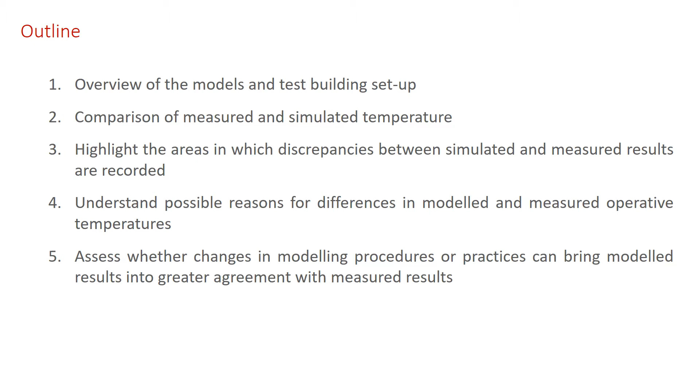So most of the results we're going to look at today are for the west house. The east house was basically used as a control with the windows always remaining closed, but again with all the TM59 schedules going on. For our tests we used two pieces of software, both TAS and IES, Dynamic Thermal Modelling softwares, these being the two dominant softwares for using TM59, both being CIBSE AM11 compliant and approved for Part L. And for this analysis, both Hilson Moran and Inkling supplied a user in each software.

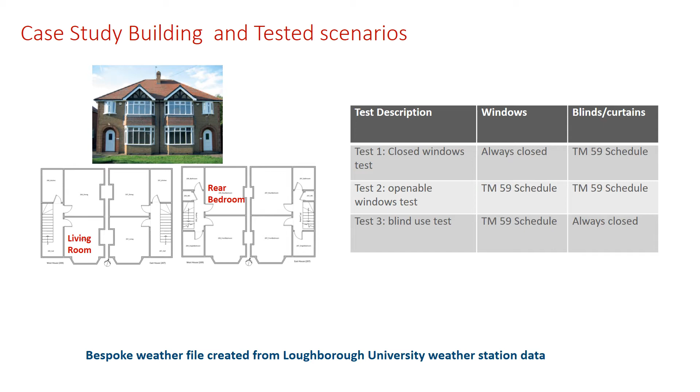There was also an additional temperature sensor in the back garden to account for any local temperature anomalies between the house and the weather stations on the university, which was about half a mile away. And from this we created a bespoke weather file to match the weather experienced by the houses.

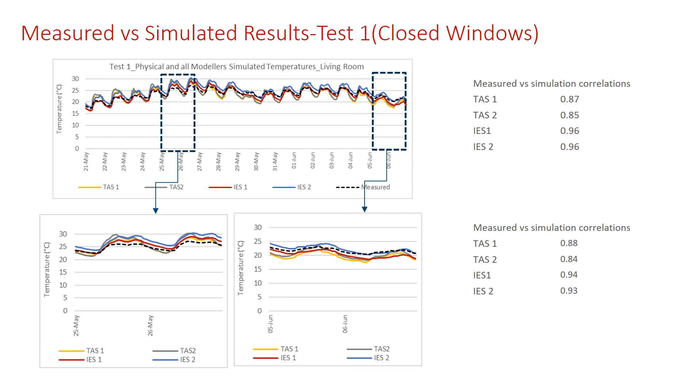So here in a bit more detail you can see the 4 model results were all in excess by several degrees of the measured results. However, over the course of the test the correlation still remained fairly good. When we looked at a cooler day, we get better matching, so some models were over predicting, some models were under predicting, but it was much closer around the measured results.

So the initial good news was that all the models were predicting very similar things, irrespective of the modeler and indeed the modelling software. So that gave us confidence that neither modelers or modelling software were doing anything particularly strange, and the correlations remained fairly good, again irrespective of modeler or modelling software.

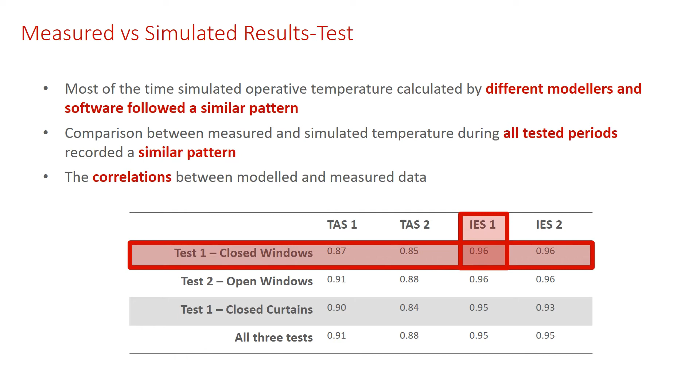So going on from this, we needed to understand what the discrepancies were and what we could do. So the first thing to look at was the environmental factors, so external air temperature, wind speed, radiation. So first set of results, we're now only looking at one of the sets of results, this is from Modeler 3, rather than look at all 4, because they were all exhibiting very similar trends.

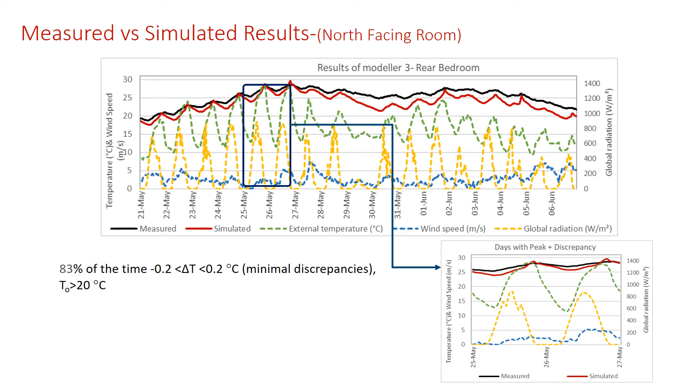Looking onto the rear bedroom, so north facing, we saw a bit of a reverse. So despite it being a hot sunny day, the simulation was under predicting at points against the measured data. Now if we go back to the living room and look at a cooler, cloudier day, and actually this day is relatively windy as well, we could see that we were under predicting at this point. So for the south facing room, the models were predicting cooler temperatures than the building was measuring.

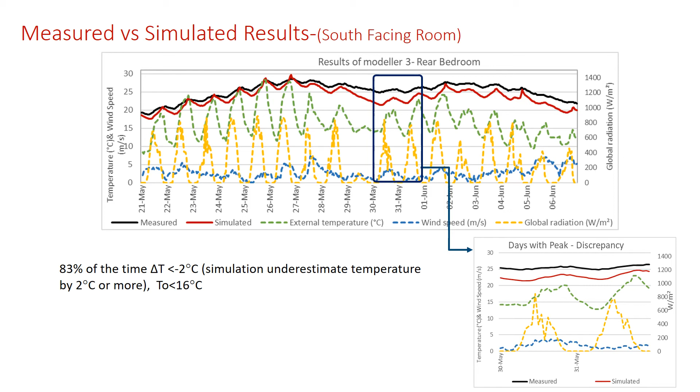Similarly for the rear facing bedroom, when we got these cooler conditions, particularly in this case where we had, for May, quite a cold day preceding it, the temperatures for the modelling tend to diverge quite significantly from the measured data. So what we draw from this is, in the south facing rooms we tended to overestimate the operative temperature.

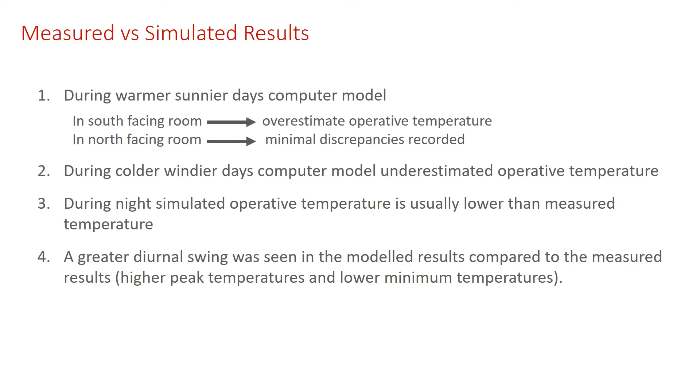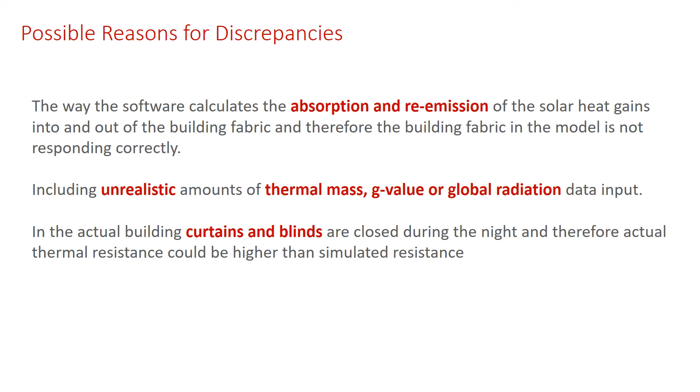So the team pondered on what the reasons behind these discrepancies could be. Such things as thermal mass, solar radiation, the transfer of the G-value and transmission through the glass, and even potentially the curtains and blinds in their operation. So actually in the testing we looked at 8 different variables to test. Of these, 4 seem to bear the most impact on the results, and I'm going to look at these in detail now.

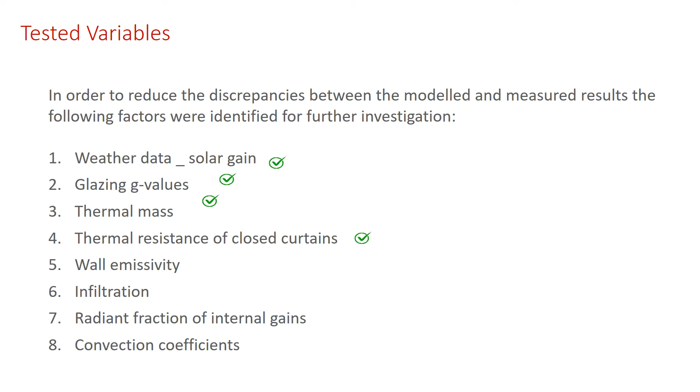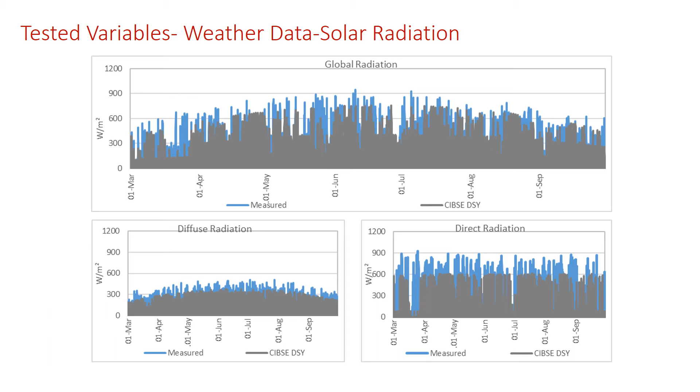So the first thing we looked at was the radiation data. When we compared our measured radiation data from the on-site weather stations against the CIBSE DSY file for Nottingham, which was the nearest DSY file, we noticed that the radiation, particularly direct radiation, was considerably higher than the CIBSE DSY, and whether this is some sort of averaging in the DSY or other reasons we did not know. So what we did in this case is we clipped the solar radiation never to exceed just over 600 watts a square metre, which is what we were seeing in the DSY, and we ran these results.

So looking at the living room, now the original model is the trace in red, the modified weather file is the trace in green. So for our peak sunny days around the 26th, 27th of May, our correlation improved significantly and didn't change too much on the cooler, less sunny days as expected. Conversely though, the rear facing north bedroom got considerably worse, moving away from the measured data. So it helped on the south side, it made it worse on the north side.

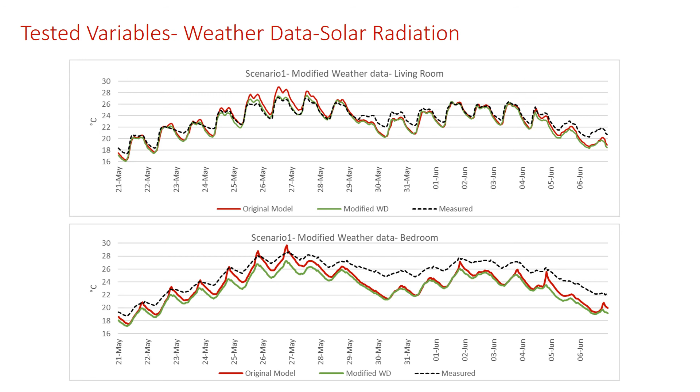So the next thing was to look at the glazing G value. So from the information we were provided, we think the glazing G value was about 0.72.

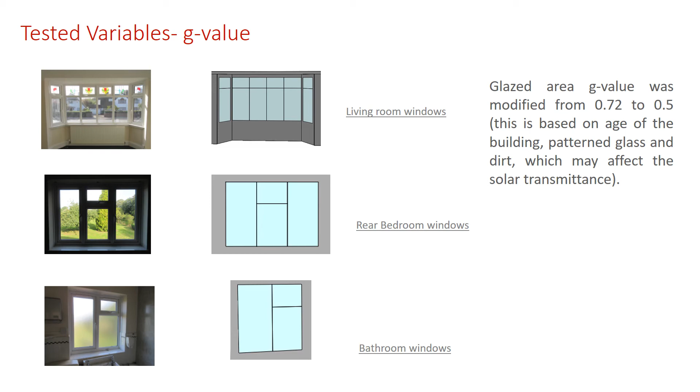To maybe allow for dirt on the windows, some of these patternings and stuff we see in the actual windows, we reduced the G value to 0.5 to see if it had an effect on the results. So looking at our south facing living room, again, when it's sunny, reducing the G value really helped the correlation, but when it was cloudy and cooler, it moved it away from the actual measured results. Similarly as before with the weather file, for the rear facing bedroom, reducing the G value moved the model results away from the actual results.

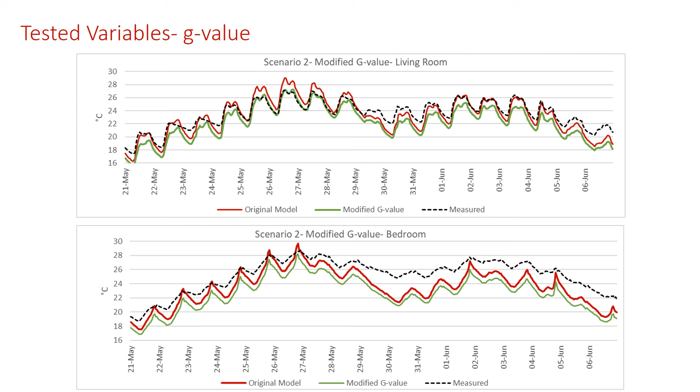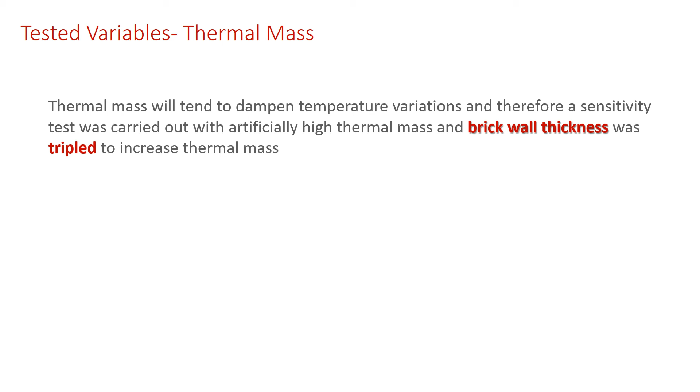Next we looked at thermal mass. We'd done some initial tinkering around with the thermal mass, but it wasn't doing too much, so we went for a sort of extreme test. So we tripled the thickness of brick within the walls just to see what the effect was. So again, looking at our two rooms, in our living room, increasing the thermal mass on the sunny days made it fractionally worse in cases. It did tend to help us, as you expect, on the cooler days. It's retaining more heat, so it made a slight improvement on the cooler days. Not much change on the hotter days.

For our north-facing bedroom, again, it tended to help on the cooler days, and there's small changes when it's very sunny.

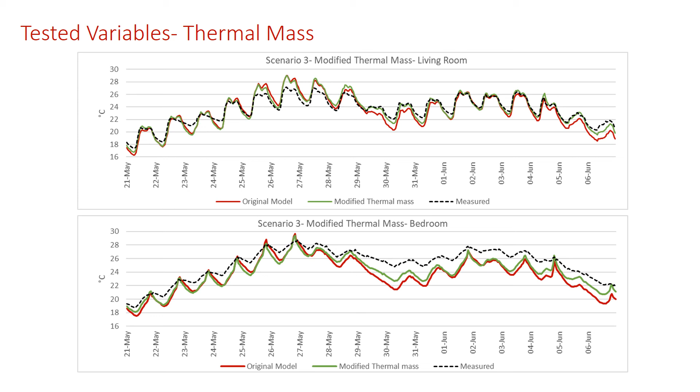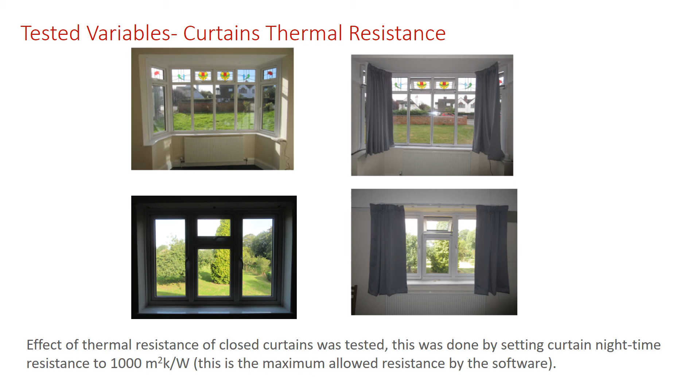And finally, looking at the curtains, the effects of the curtains in the modelling, we weren't sure if this was being done correctly in the models, because it's usually as part of the construction. As you can see here, there's gaps around the windows. The curtains never hang very tightly to the window, so there's a good chance for air movement. And so we increased the resistance because maybe we thought there was extra resistance in the curtains to see what happened.

The answer was for the south-facing one, not a lot. Very close, minimal changes to the plots, both sunny and in the cooler conditions. And similarly for the rear bedroom, made it fractionally worse when it's sunny. In fact, fractionally worse right through the trace, but very similar results.

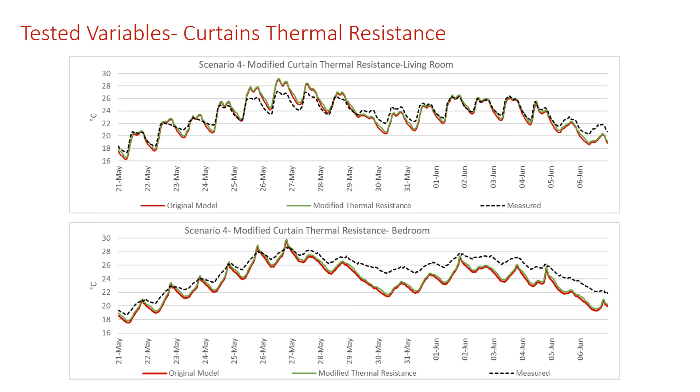So despite testing many variables, we didn't come up with the silver bullet which brought the results of our model data closer to the measured data. The results here are presented as just a small sample of the various combinations that were tested. The comforting thing from an industry perspective is that all the models responded in a very similar way, irrespective of modeller or modelling software. However, broadly, all the models over-predicted temperatures when the room is exposed to hot sunny weather, underestimated temperature on cooler overcast days, and overestimated the swing day to night.

I guess the good news from an overheating perspective is this means that we might be over predicting the temperatures we might get in new developments in the day, and therefore we might be over specifying the facade performance or shading, etc. But conversely, we might be underestimating the nighttime overheating risk.

For this particular building, there were many aspects that weren't completely known, such as the constructions, how the walls and cavities were actually ventilated, and these had to be estimated. The other thing to bear in mind is that this building is relatively old and doesn't represent the type of construction that we find today, particularly in high-rise curtain wall type developments. We're planning to do some further research into this to see if we can narrow the gaps in the way the models predict overheating.